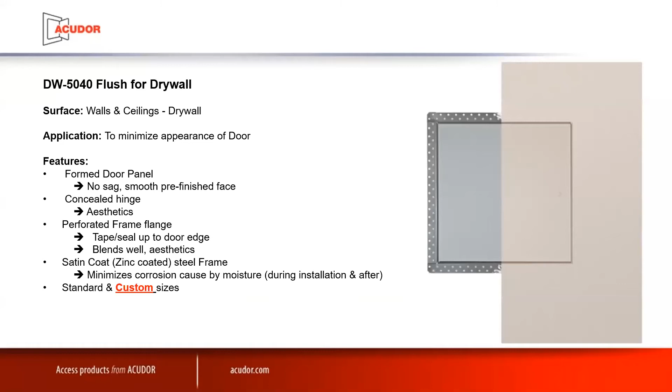A very similar door is the DW5015. Unlike the 5040, it does not have the drywall pre-installed in the face of the door, but it has a similar application and can be used in similar environments. It's a recessed door to accept 5/8 drywall on site, and the door face blends in with surroundings quite well.

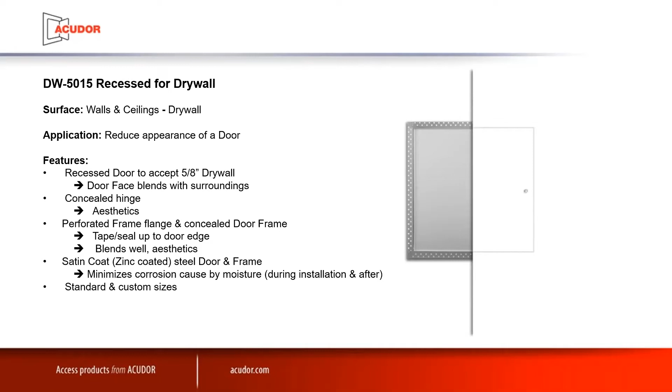Once again, it has a concealed hinge, a perforated flange, and a concealed door frame. With proper taping and mudding, it blends in very well and ends up being quite hidden in the finished wall. I should mention too, the metal used in this door works well in corrosive environments.

The DW5058 is one of our newer doors. We really see this as the flagship door for the interiors line. It's a very multi-purpose door that can be used in a variety of different environments, and it allows for tremendous, easy access to the mechanical behind the wall.

This door was just released late last year, and it comes in square and round. Round is a little more unusual, and is really only used when it's designed to match either a light or a speaker in the same room that is also round. More often than not, it is specified as a square door.

It's a recessed door with pre-fitted drywall, meaning we install the drywall in the door before it leaves the factory. It can be fitted with either 1/2 inch or 5/8 drywall to match the wall thickness it's going into. It has an aluminum frame, so it's very resilient to moisture, and it's a very light door to install. If you get a chance, there are some good installation videos on YouTube or our website.

You will find an install video for this exact door showing how easily it comes out from the frame. Unlike a door with a traditional hinge, the 5058 comes entirely out of the wall or ceiling if you need complete access to the mechanical behind it. It comes powder coated white, and there's felt gasketing all the way around the door to prevent any light leakage behind the finished product.

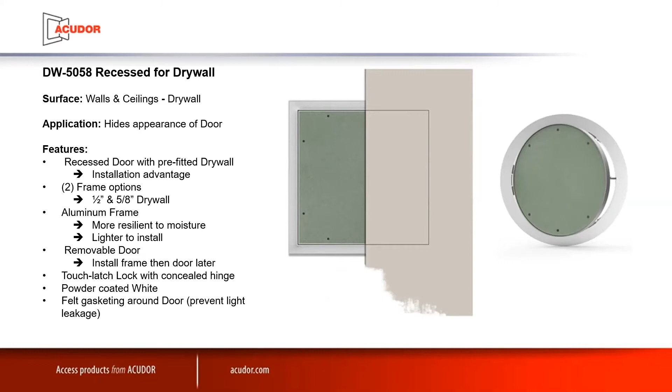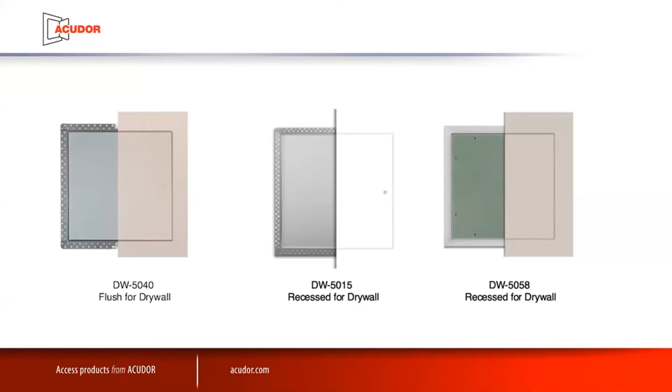So while this is certainly a newer door for us, I think it will likely become our most specified interior product in the near future. Just a quick comparison of the DW series, all very similar. You'll notice the 5058 does not have the visual lock, making it the preferred access door for specified interior environments.

Moving on to the FW and FWC series. FW simply means wall, and FWC means wall or ceiling, but really more so ceilings. These doors are fire rated, meaning we have gone through fire testing on them. Very often you'll find, in a fire rated wall environment, a door that's not fire rated installed, which means you're jeopardizing the fire assembly of that fire rated wall, be it 1 hour, 90 minutes, or 2 hours.

We have gone through extensive testing to get this series of doors fire tested, meaning you're not compromising the integrity of the fire rated wall. These doors are recessed and fitted with fire rated Type X drywall, and accept a skim coat that blends very well into the finished environment. They are zinc coated, meaning they resist corrosion in high moisture environments. The testing standards are CAN ULC S104 and UL10B for the States, and the ceiling standard is ASTM E119 or NFPA 251.

Now, I should mention about 20 to 25% of our business is specials and access doors, meaning either a custom door or a custom size of an existing access door. With fire rated doors, we are limited to 24 by 36 as the single largest size we can still apply that ULC or UL rating to. So keep in mind, while we can certainly design, engineer, and manufacture customs for you, there are limitations with fire rated doors.

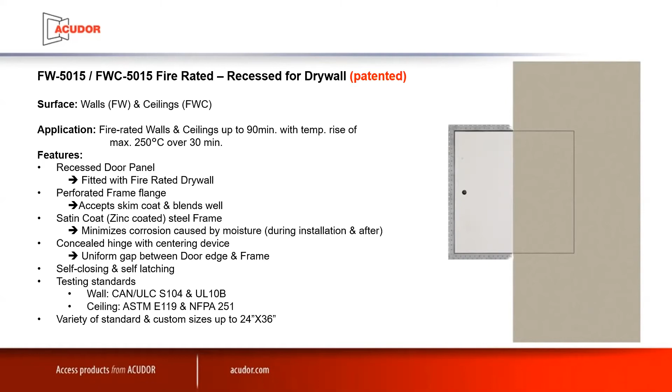This one is the DW5058TD — TD means it's designed to accept tile, which is applied on site like this. Obviously it works well in a high moisture environment. Here's an example of a door that wasn't designed to be installed in a tiled environment — you can see the visible difference.

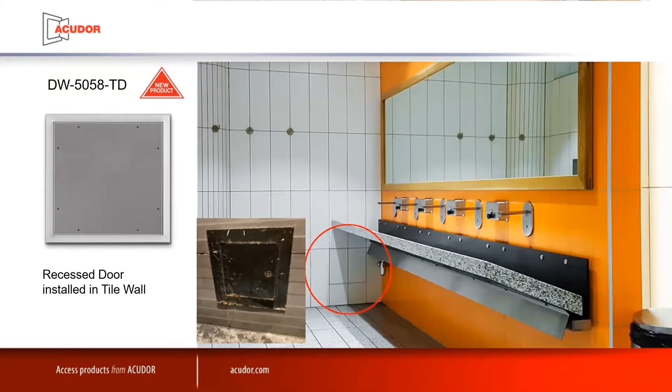So again, it comes with the pre-fitted tile backer board. We are going to install some sort of cement board or cementitious product to accept tile on site. The most important thing is that the hinge is recessed, so even when the tile is applied on site, it's not going to affect the opening of the door, because that hinge has been installed behind the finished face. So the tile, when installed properly, won't affect the proper opening of that access door.

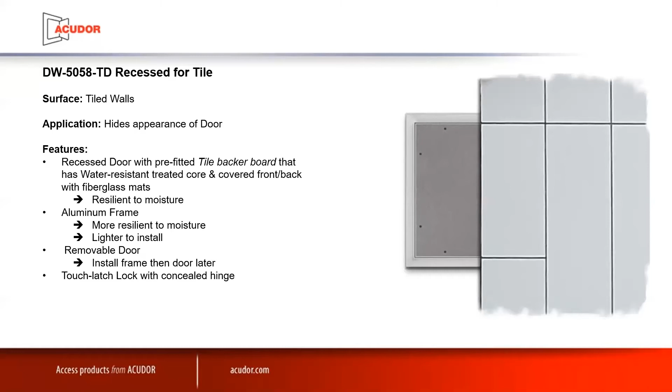So the TD5025, again, very similar, a door designed for a tiled environment. The big difference here is it does not have the pre-installed drywall or tile backer board, and is designed for heavier tiles - your marbles, any kind of larger, heavier tile. Again, the big difference is that we don't pre-install backer board. It can be done on site, or if the tile is thick enough, does not require the backer board. And again, it's a much heavier hinge and latch to accept the larger, heavier tile.

Once again, you're going to find installation demonstration videos for this door on our site and on YouTube, just to make sure that the installer understands proper application - if the tile is large enough, how to properly block, bridge, or frame out the studs behind this door.

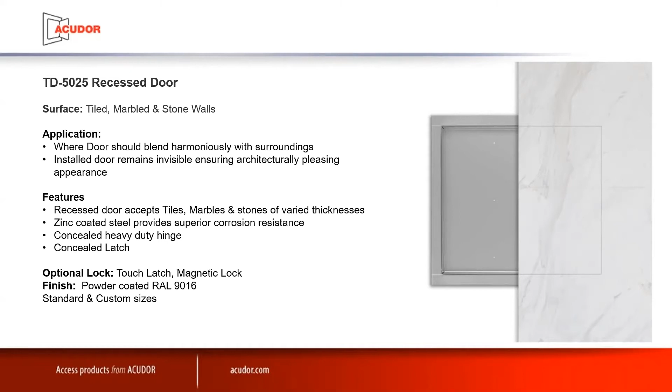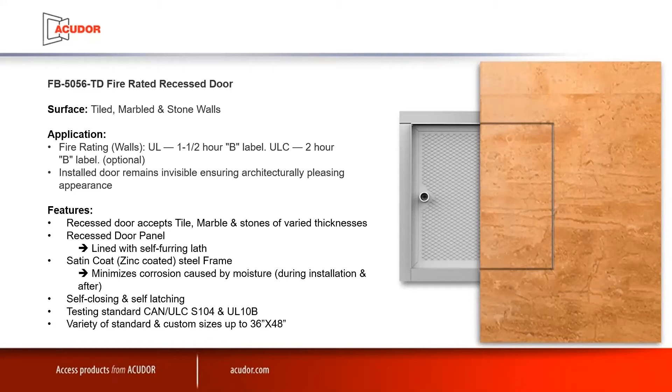So again, FB5056TD, it's a fire rated door designed to accept the marble wall. So again, it's designed for fire rated walls. You'll see here it's not for ceilings, but for walls. And again, it's designed to not compromise the finished fire rating of that rated wall. I should note too that this door can come up to 36 by 48 and still qualify under that UL or ULC designation.

Kind of a niche product here, the VFCD DW. So this is essentially a door designed to hide the mechanical ventilation HVAC system, either in hotel or condo units, goes in front of air return grills. Once again, drywall comes pre-installed. We do a decent amount of this door, but again, it's much more of a niche product than the DW5058 as an example.

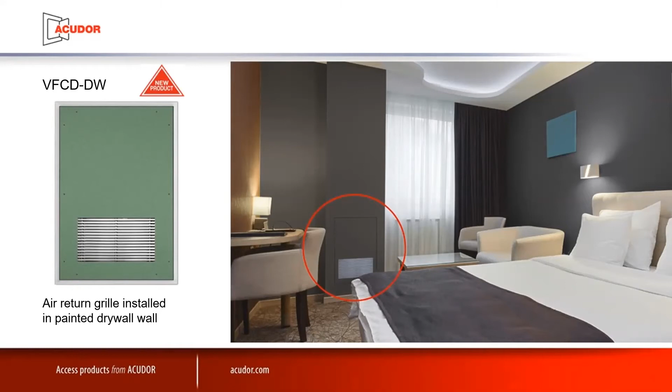All right, so getting into more of the still aesthetic, but also quite utilitarian doors. So very often we will see a spec for a high STC interior wall, be it a boardroom like this, movie theater, any environment where sound control is critical. Again, it'll be a very tight, well-defined spec on an STC rating, but then a generic 2x2, 2 foot by 2 foot, or even 2x4 access door is installed, which does nothing but compromise the sound control values of that interior room.

So in those cases, the acoustical door, the ACD 2064, is the right spec. This door does have the STC testing done on it, as you can see here. So again, it's really going to be very similar to the 5040 in terms of the finished interior appearance. What it's going to do is give you confidence that you are not jeopardizing the STC or the OITC rating of that room.

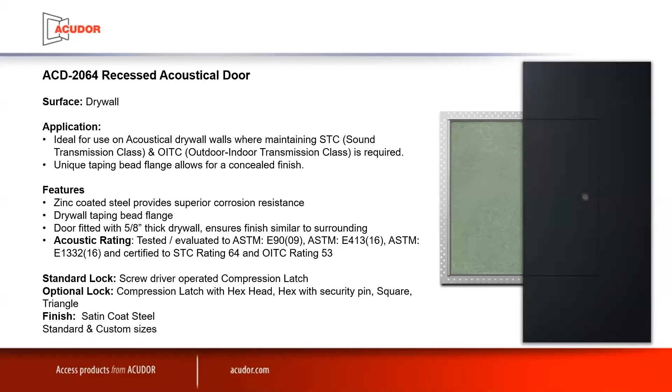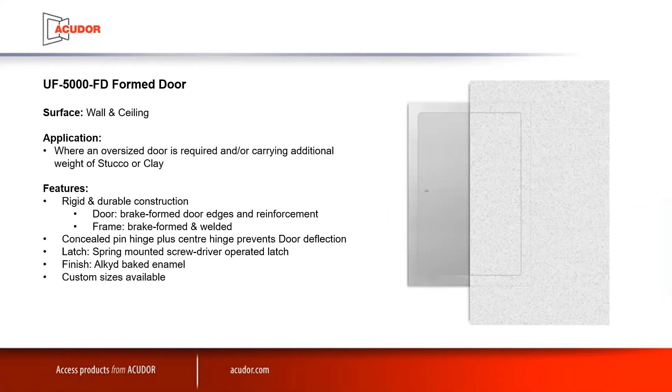ADWT. ADWT is not a door you would specify for office environments, for any kind of residential condo interior walls. It really has its niche in hospitals, clean rooms, labs. It's an entirely airtight, watertight door. So it helps you really control whatever you're trying to control in that interior environment. You can see the various testing that's been done on this door - the ASTM E283 test and the ASTM E331 test, which is air infiltration and water penetration.

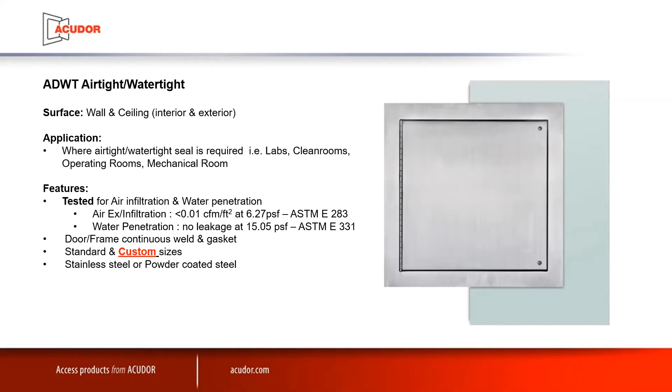Now you'll commonly see this door in clean rooms, labs, mechanical rooms. I think we actually just shipped out quite a large order for this door to a cannabis production site. So any kind of pharmaceutical environment like that, it's a very common spec for us. And this door comes in stainless steel or powder coated steel.

Now I mentioned specials. About 20 to 25% of our business at Acudor is in specials. Now this is an example of a true special, in that it wasn't based off of an existing access door. We really like this kind of project - one, because it's great for our portfolio, but two, there's really only a handful of companies globally that have the engineering or manufacturing expertise that we do to be able to design, coordinate, and manufacture truly special products like this. This is an example of a custom access door that we've recently installed into Times Square in New York.

We were brought really nothing more than a mechanical spec on size and what was behind these doors, the finished environment they're being installed into. It was a very cooperative design process. This was the end result, which is a fully gas strut operated multi-compartment watertight door.

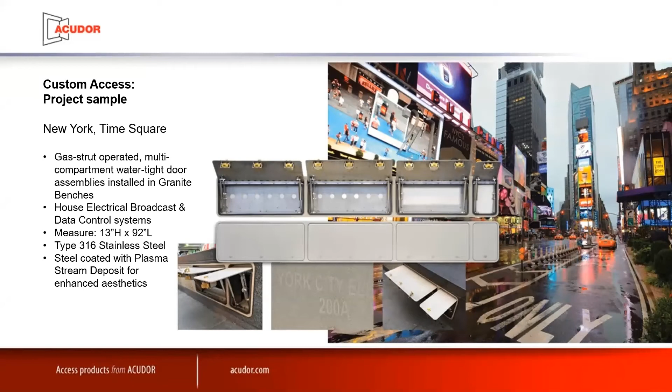It's installed into granite benches in Times Square. As you can see, it's quite large at 92 inches long, and I believe the intent is a 10-year life cycle. So designed to be a very durable and yet still concealed product. We really welcome the chance to be involved, interact, let us consult on any special requests or needs you have for access systems like this.

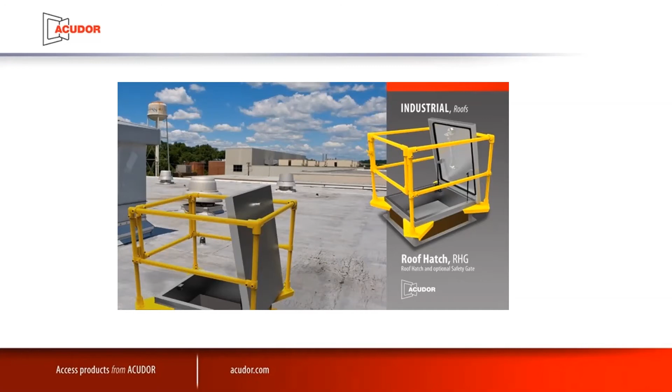Now, I did promise that this presentation would be focused on the interiors line, so I will just quickly mention that obviously we are certainly quite a large manufacturer in roof hatch and roof level penetration and access systems. This is really just a snapshot of the most common kind of generic 4x4 roof hatch on the market.

I won't say much about roof hatches except, again, I'm sure you're all familiar with them. They're installed into virtually every commercial industrial building. We do have the full spectrum of standard roof hatches: electrical, self-actuating, mechanical, hydraulic, in all the standard shapes and criteria.

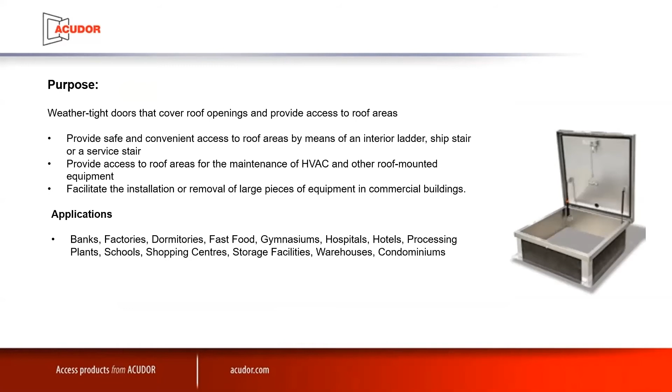We are about to launch, I think next month, the thermally broken roof hatch. So the big difference here is even though the other roof hatches are fully insulated, there really is a true thermal break from the cover into the curb or walls of this roof hatch.

Not only is it of a higher R value than your standard roof hatch, but it really does thermally insulate the exterior from the controlled interior ambient environment. So it's going to have a higher R value, higher RSI value than your standard roof hatch. But also, there are cases in extreme exterior colds and warm interiors that condensation can be a problem with roof hatches. This is really designed to prevent any kind of condensation because we are fully thermally breaking the exterior from the interior, or the part of the curb that does connect to the interior of the ceiling.

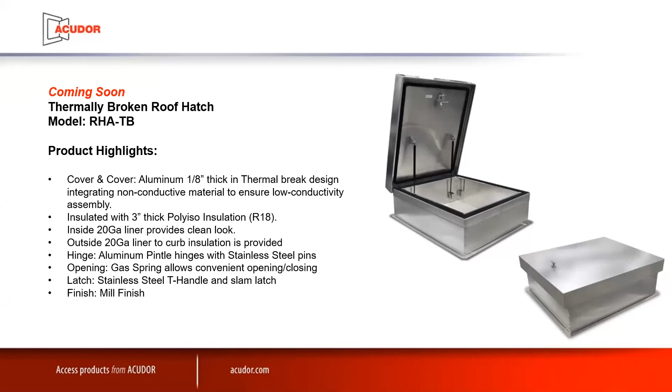And then finally, we really do find the majority of our success in the roof hatch market is in the highly engineered, highly custom, bespoke, large roof access products like this. I hesitate to even call these roof hatches because they really aren't a typical roof hatch.

We're commonly brought in to help design roof access systems where regular access for cranes through a roof environment for equipment or materials is required. So very large roof access systems like this, 118 by 126, it's actually one we're doing right now for a site in Quebec, I believe.

We do find a lot of success with our engineering group in being involved at an early stage to help the designer really understand what he can do, what limitations exist, or the size and kind of functionality of a custom bespoke roof access product like this.

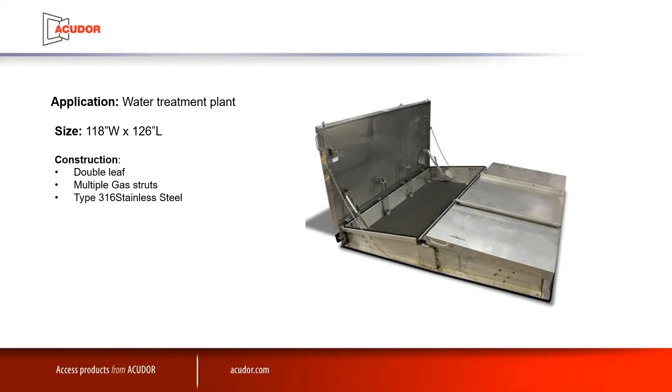This is a series of roof hatch or roof access systems that we have just finished manufacturing for an oil refinery in Kuwait. I believe the last one shipped out early March, if I recall correctly. So we did a number of these for this oil refinery in Kuwait.

And I mean, they're massive. They're 16 feet wide by 16 feet long, double leaf, electrically actuated. These are designed to allow consistent access through the roof level for finished goods.

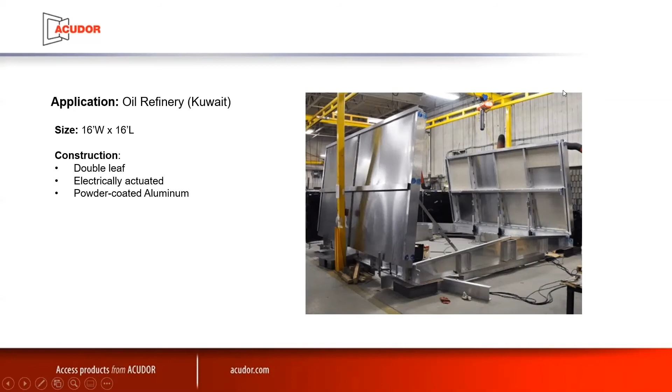Again, it's a job in Kuwait, and a company out of Pickering was brought in because there are so few companies that have the experience and engineering to be able to design, manufacture, and create installation drawings for a product of this type.

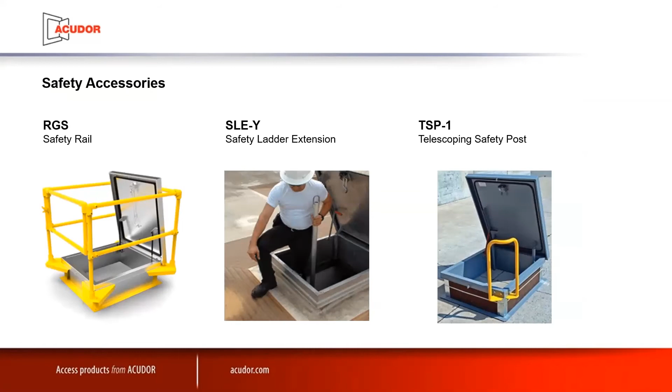So a little more just with the standard roof level accessories, safety products. And that's it for access doors.

So before I launch into architectural metals, should I stop for any questions here? Is there any questions or comments anyone would like to do? I don't think so. I think it should go with the...

Architectural metals? Yep, okay. So I mentioned that Nelson is a manufacturer of various metal products for the construction industry. Acudor is our most high profile, our longest existing standing brand.

Architectural metals would be a very close number two. Architectural metals is a division of Nelson that was started in the late 80s and covers primarily interior metal finish systems - ceilings, column covers, interior wall panels, and some exterior grills and screens. So unlike access doors, it's much more on the decorative side. While there are certainly fire or functional reasons why you would work with Nelson on interior finishes, it tends to be more of a decorative product than the Acudor line is.

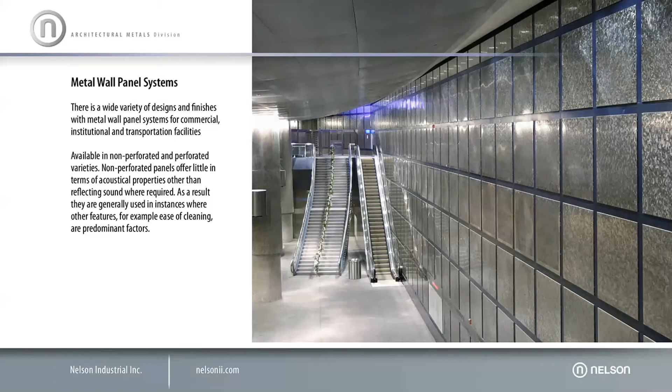So again, as mentioned, those are some of the NRC reasons why you would look to a decorative metal wall panel system.

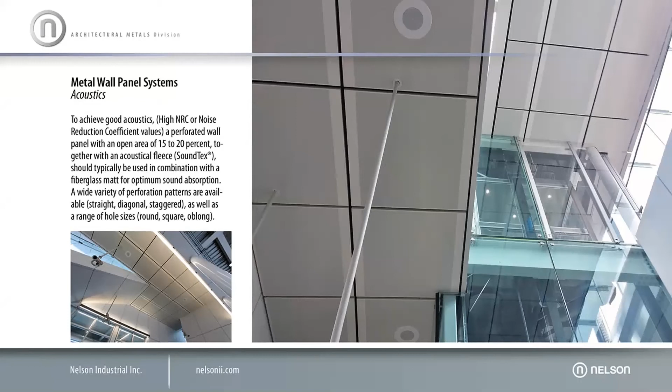Acoustical ceilings - as I mentioned, we really made our name as a supplier in this division, in architectural metals, in the ceilings market. Here you'll see an example of what we did at Pearson Airport probably 8 years ago now. We did all of the torsion spring and lay-in ceiling panels in the major Terminal 1 renovation, I think 8 or 9 years ago now. We continue to this day to still be supplying Pearson with various ceiling panels in parts of the airport - train stations, airports, bus terminals. Really that transportation infrastructure type market is where we've found our wheelhouse. There aren't too many competitors that do more in this space than we do. The product lends itself very well to this environment, again for upkeep, durability, and sound performance reasons.

I'll go through this very quickly. Some advantages of specifying metal ceilings: durability and longevity. Metal ceilings are less prone to cracking, warping, billowing, or showing signs of damage in the event of water infiltration. Metal assemblies also offer access to mechanical systems housed in the plenum without fear of breaking fragile gypsum or mineral tiles. I should elaborate on that - we do design, whenever possible, both the wall and ceiling systems to allow for easy access to the mechanical behind that wall.

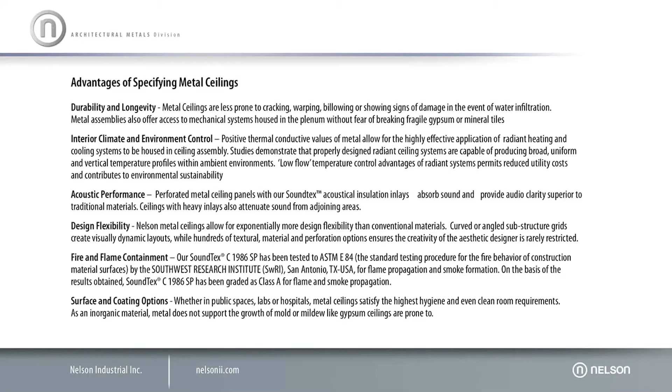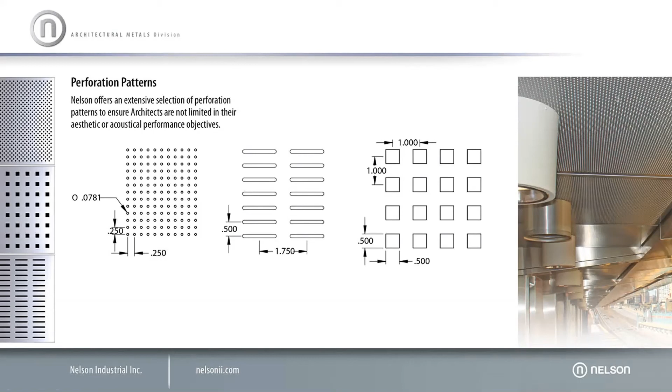Perforation patterns - you'll find our standard perforation catalog on our website, or I can email it over. We have a few dozen standard patterns. While we can certainly give you a custom, more aesthetic perforation pattern, for cost control reasons we have a fairly broad catalog of existing patterns to choose from. Typically you'll see this kind of pattern in a ceiling system. To maximize the NRC or acoustical properties of a ceiling system, we typically suggest a perforated area of around 15 to 20% of the ceiling.

We're doing that right now with a number of US projects where the exterior walkway ceiling system selected is the same as the interior, which gives a nice consistent look throughout the entire building.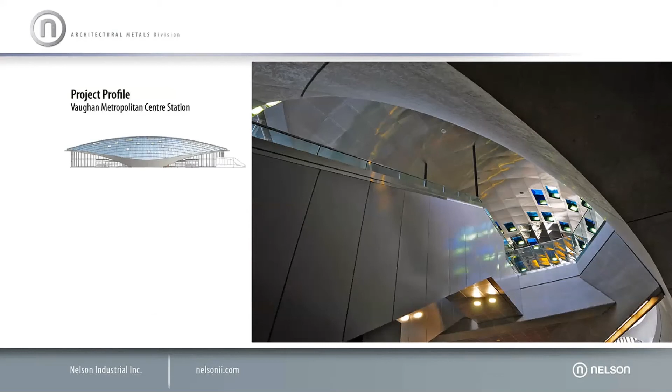A quick project profile - this is a really amazing project we finished, I think last year, but started in 2018. A lot of you might even use this station - this is the Vaughan station. It was quite a high profile and large site. We manufactured in 2018 over 10,000 square feet of stainless steel ceiling panels comprised of both perforated and non-perforated panels, creating a kaleidoscope effect for the commuters and users of this station.

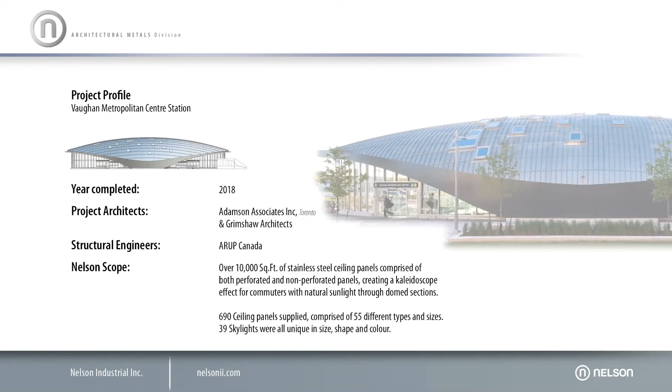The 690 ceiling panels supplied comprised of 55 different types and sizes, and then 39 skylights were integrated into the panels. We had some areas where the panels were up to 5 feet deep, and not only were they all curving on the inside, we also had to coordinate the curving of multiple panels to ensure the skylights would bring the full amount of light into that indoor environment.

And then Arborite. Arborite is our proprietary wood grain product. The wood grain is what it sounds like. It is a laminated material that's heat sinked onto aluminum, and it gives you that look of a wood ceiling, really quite impressively, wood wall or ceiling, but still have the benefits of a metal ceiling.

Hello, can you hear me? Yeah. Hi, I'm Andre from IBI Group. I have a question regarding the first part, access panels and doors. I've heard complaints from contractors about drywall recessed hatches, like DW5015. The complaint was that it's not really suitable for heavy duty use because drywall tends to crack at the corners. So my question is, is this probably something wrong with installation, and are there special requirements for drywall contractors that probably people don't know?

Yeah, again, that's a very good question. More often than not, the problem is they're not following either ours or a competitor's installation instructions. Whenever it is a large door, or a door being installed that's carrying a heavier load, be it thicker drywall, even a tile finish, we always recommend, as you'll see in the installation videos on our website, that the drywall contractor frames out with steel studs and steel track the area around that door. So you're not relying on the drywall to carry it, you're relying on the blocking and bridging of additional steel behind that door.